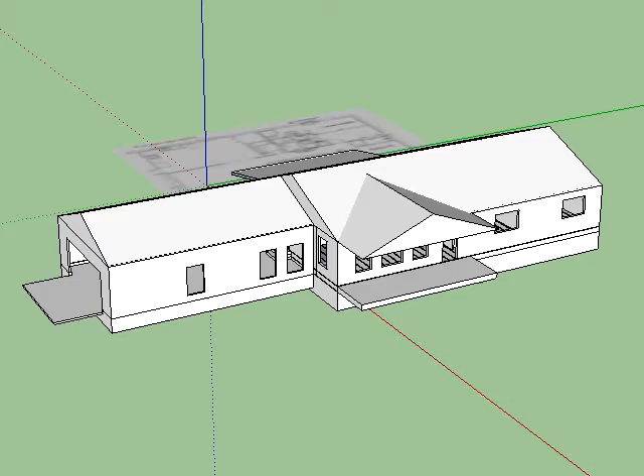Hi you guys, okay, this is what I'm coming up with so far. The roof I just threw on really fast because I don't know if we ever talked about exactly what kind of roof you wanted. You could go

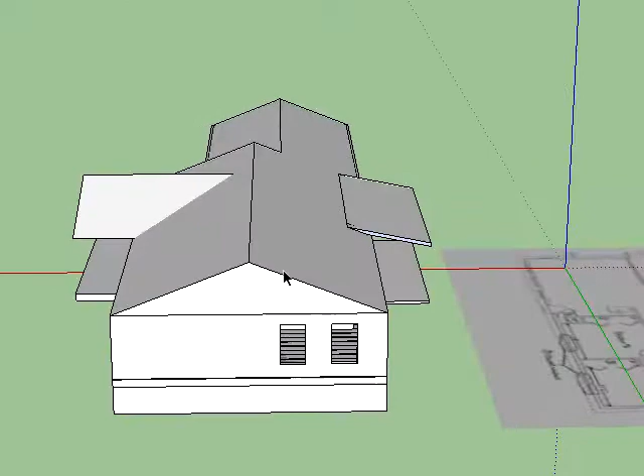Hips on the ends, hip here, hip here. I'm not quite sure what you wanted, so I just threw this on to get you thinking, and I put a little shed above the back porch. In the back, just to start discussions, I put a concrete slab in back, this being more of a deck kind of thing. So I need to know what you want there.

Okay, if we start at the foundation, to show you what I've been doing - I made a 42-inch wall, and it'll be a 6-inch by 12-inch foundation or footing underneath it. I believe you want as tall a wall as you can get with a 4-foot panel. That's an easy thing for the foundation guys to do. It gives you a lot more working room down there.

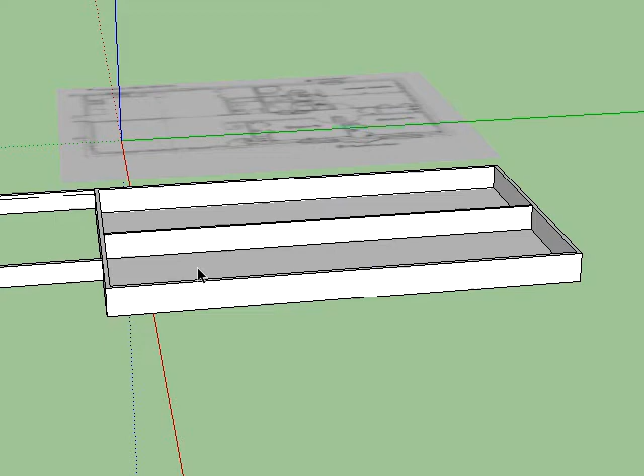This here would be a framed in wall with openings every so often to get passed through between. The garage foundation need only be like 30 inches and then slab on grade in there.

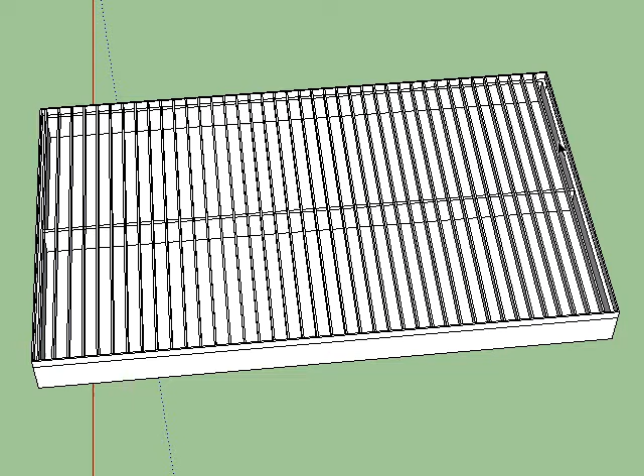This shows the joists. I highly recommend the manufactured silent floor joists, TJIs. They're just so quick to do, and they're as squeak proof as you're gonna get. They're just a really good product. And they just split it right down the middle, and that's your bearing, that's your bearing, and that's your bearing.

Everything is pretty much exactly as you had sent me in your last edition, and I think it mostly works. I'm still a little bit - you can see I did something different here. We can look at that first here.

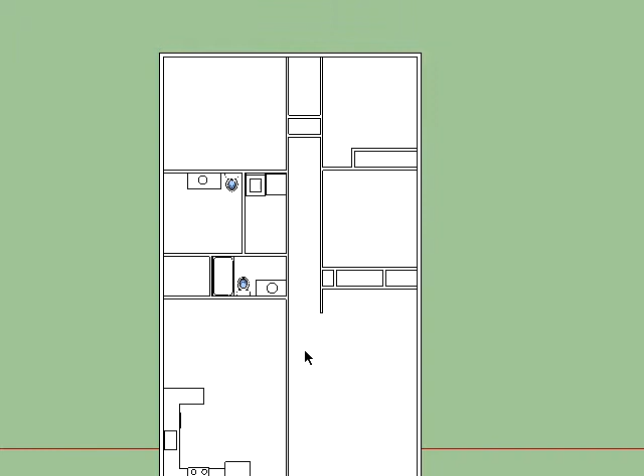The master. What you got when you got 10 feet, so I put this over here, but that's totally dependent upon where you are with the vanity. If you only need a 4-foot vanity, single sink, then that works really about as good as you can get.

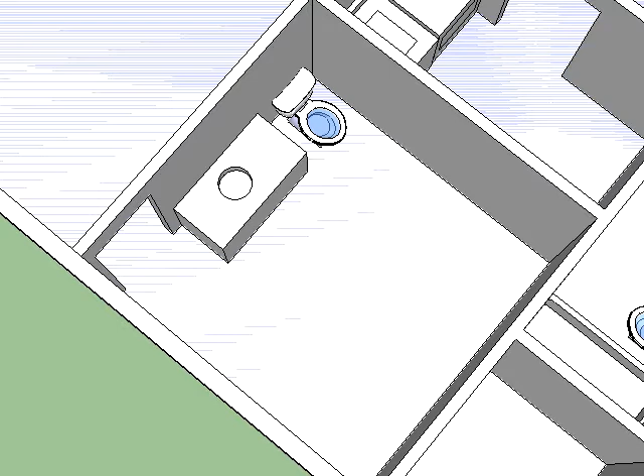The problem you got with this is, if you're gonna have a soaker tub, you've got to give yourself - 4 foot's nice, but let's say 3, we go 3'6", and then if you go with the toilet, if the toilet were there, you'd need to get it at least approximately 34, and then you'd only have in front of the toilet 1'8". That still can work if that's the way you want to do it.

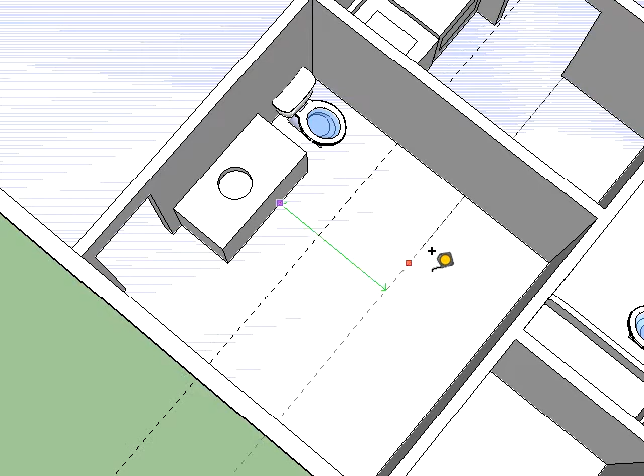If you want the long vanity, we can move this around. I just wanted to show you that for an exception. What I have kind of figured here is approximately, well let's see, a 6 foot for your soaker, leaving your 4 foot for that, the shower. So that's what I got going there.

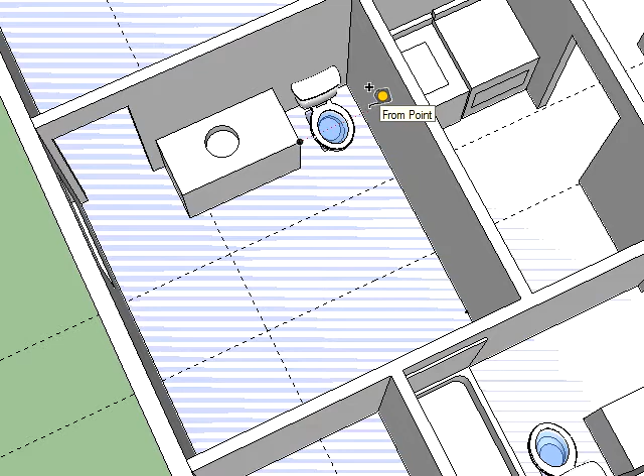If you want me to move this around, and you don't mind that this is crowding it right at the end, then I can see where you'd want to have more vanity space, but then this last portion of it is going to be real crowded, it's going to be a little bit crowded over there. So that's why I'm suggesting that.

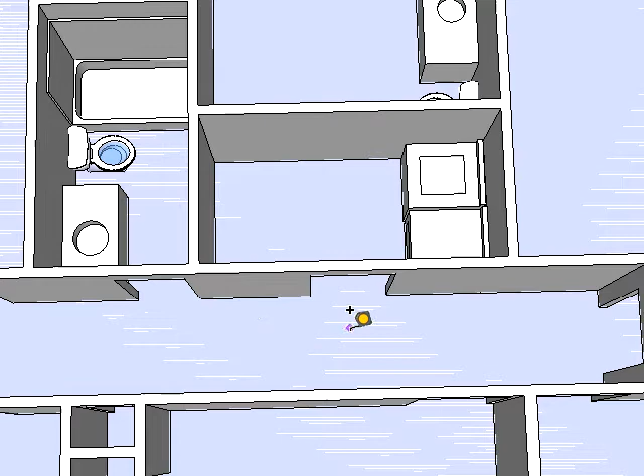The laundry room, I think works fine as long as you don't need a lot of space in there. You showed, I think, like bifold doors in there, but if you want those, that's fine. But for going in and out over and over again, the pre-hung doors are vastly superior.

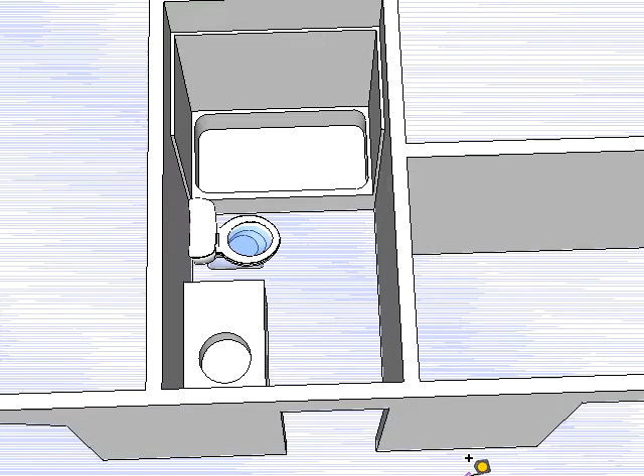Bathroom over here is just as drawn. One thing I am kind of thought of and suggesting right here is at the end of this closet, just put a little - it only has to be about 18 inches deep, or even 16, I think is what I drew it - and then you got a nice little linen closet straight across from that. So that's just kind of an idea.

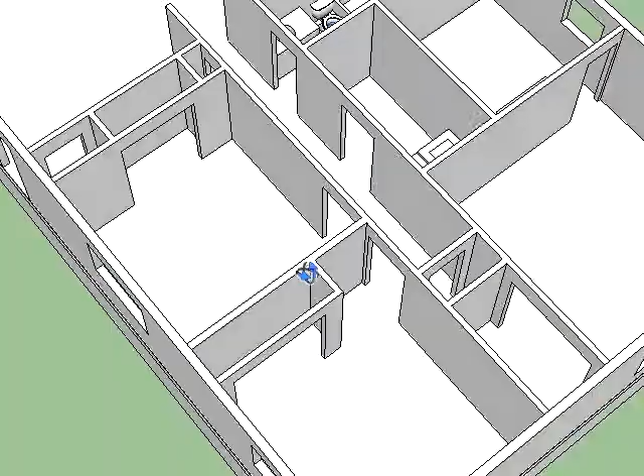That's all, I didn't change anything down here. I don't know what size doors you want. I think I drew 2.6.

To me, 3-foot doors are a good way to go for getting in furniture, and if anybody ever winds up in a walker or wheelchair.

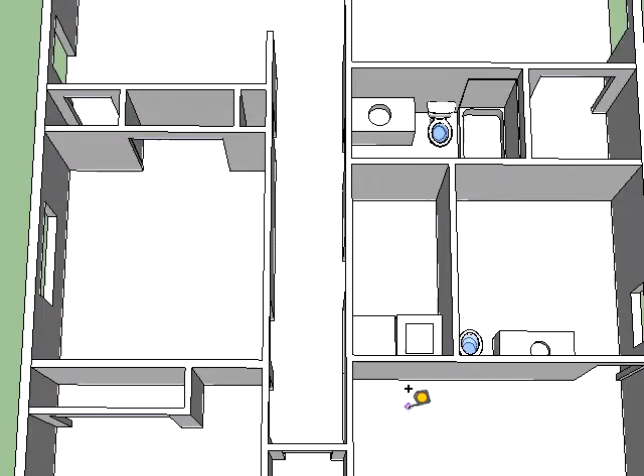Let's look at the windows really quick in here. I went off of your plan, they were 3 foot, that's the size they were. I didn't know how deep you wanted them to be, the depth of them, so I made them 5 foot. If that's not what you had in mind, you let me know.

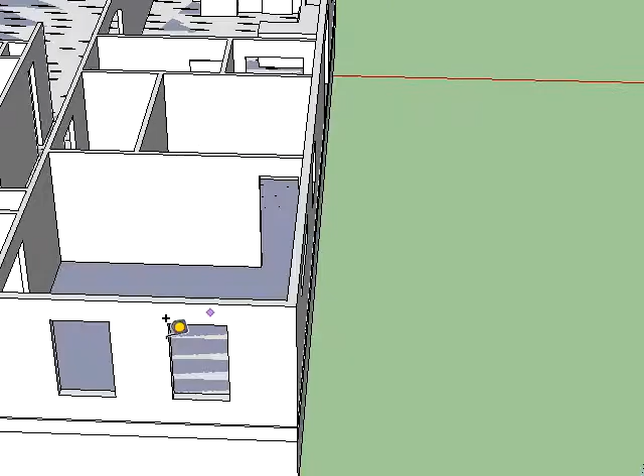You had said you wanted a suggestion. It depends on where you put your bed. If your bed - this is a nice window to put right above your bed for letting in light, and you always have a nice, like the sky coming in through that window.

Other than that, I just put a 6x4. If you were going to put the bed going this way, then I'd move this around on top of the bed. That just is, I think, a 5x3.6 and a 5x3.6.

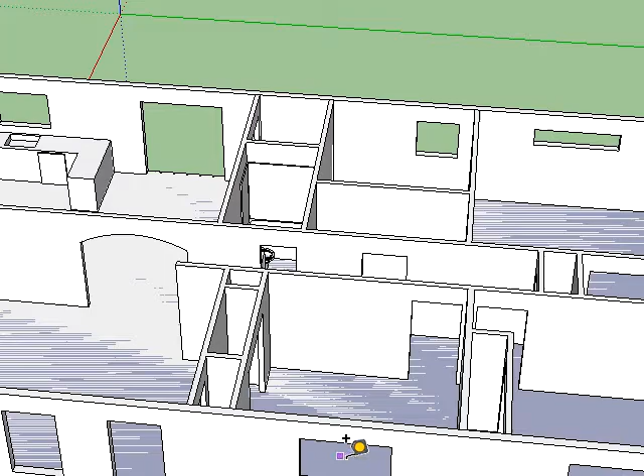Again, I didn't know exactly what you wanted for your windows in front, so other than the widths, which were 3, 4, 3, and 3, I just made them 5 foot deep.

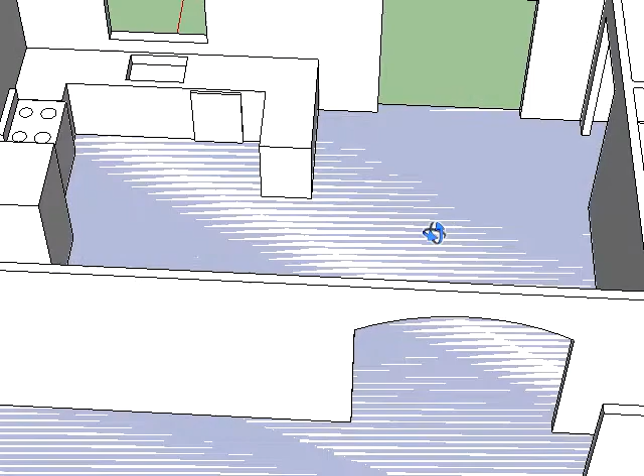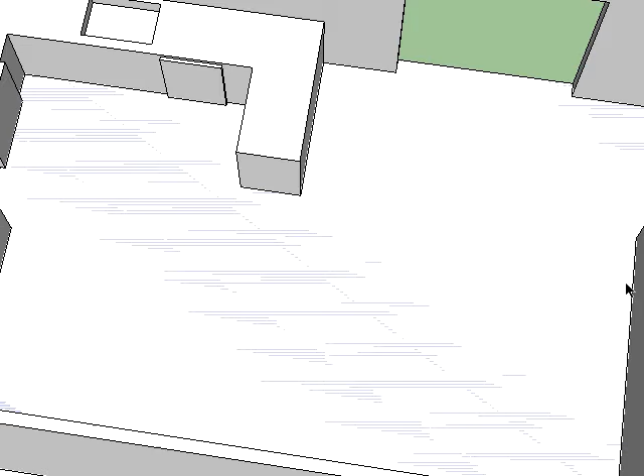Okay, now let's go to the kitchen, because I did make a slight change there. This I thought was too long in your drawing, because in a dining room you want, especially when you got the pantry over there, you want to be able to get around real. So the way I've got it is 10 - I think it's 11 foot - and the way your plan showed it was just 10 feet.

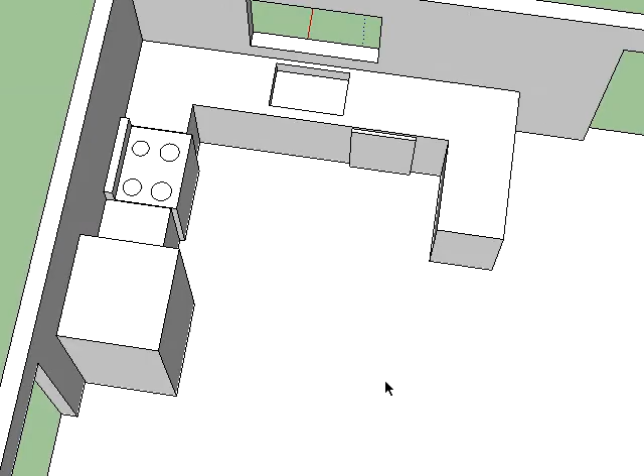You could easily bring this out and make this longer right there if you wanted more cabinet space. But other than that, I left your kitchen pretty much as drawn.

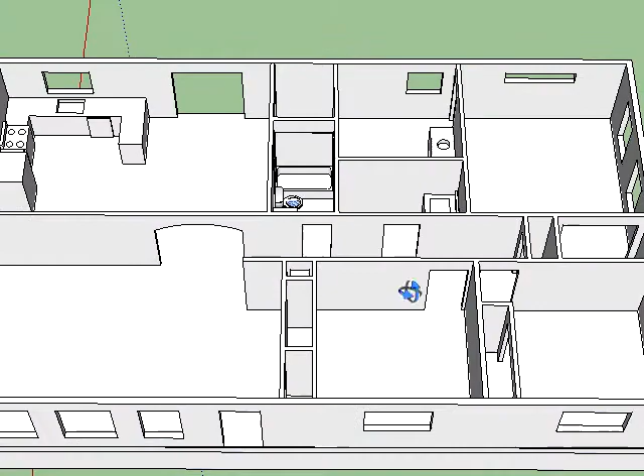And your door there, I made this an archway. I didn't know if that's what you wanted or not, but that's just what I drew in for this. Other than that, I can't think of anything right off the top of my head. This ought to give you some things to think about.